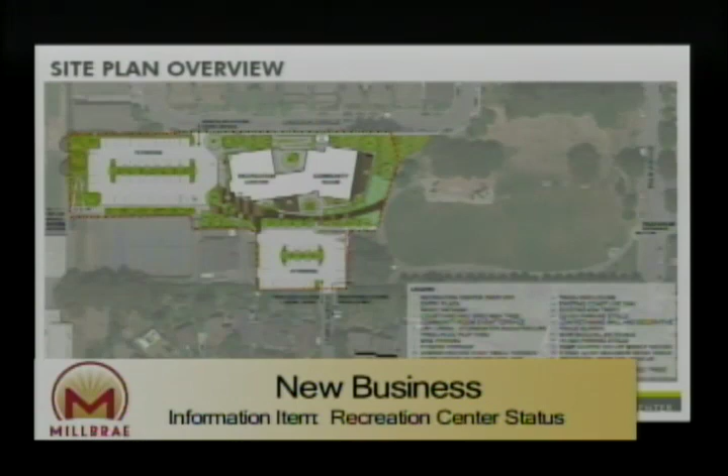So with the work plan, as Yana summarized, we're currently wrapping up schematic design. We're scheduled to go to council in August for approval of schematic design and have had two study sessions with them to refine the design.

As we look at the site plan, if you recall, what we're currently working on is what you might consider phase one of the site master plan for the park, and it includes all of the areas on your screen rendered in color, including the parking lot off of Lincoln Circle.

To the left of our screen is Taylor Middle School. The existing parking lot off of Lincoln Circle is about the same location as the proposed new parking lot. Our building footprint is located along our paseo, which connects from Taylor Middle School through the paseo down into the park. It's really important that we're working with the landscape architect to make the connectivity to the existing park and pathways, and to blend in seamlessly, even as this is phase one before the future phases might occur.

As we look at the different site amenities, we have the entrance, a parking lot of 72 spaces off of Lincoln Circle, accessible parking, a drop-off next to our entry to the building, and the paseo which connects down to the park.

We have a fitness patio located here, then the secondary entrance to the building, which connects to the community room where the restrooms and kitchen are. This can be segregated off from the rest of the building for special event use and security, being able to separate the community hall from the rest of the building.

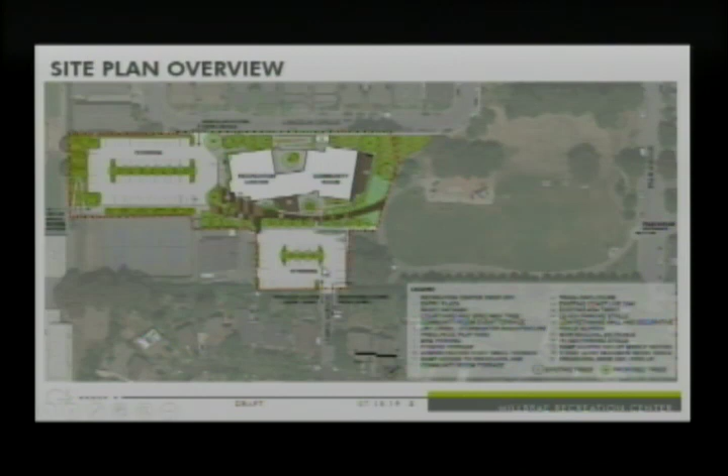The second parking lot, located over here off of Laurel, is also shown as improved, but pretty much the same footprint that we currently have.

As we look more at the hardscape finishes being proposed, we're really trying to build off the concept of nature, integrating into the park using neutral, natural tones—gray for the basic concrete, and colored concrete to create a nice pattern for the paseo as you proceed down from the Lincoln Circle parking lot into the park.

Looking at the special concrete marked item C, that's our fitness patio as well as the community room patio. What we're proposing there is to actually stamp the concrete. One nice option right now is a porcelain tile with a wood grain look, which creates more interest than plain concrete. Stamping it with the wood grain adds texture and differentiation from the standard concrete, setting those spaces apart.

As we look at the play yard located at item E, we're going to have a special surface appropriate for a play structure, if one is included. I think they're considering two or three different options right now.

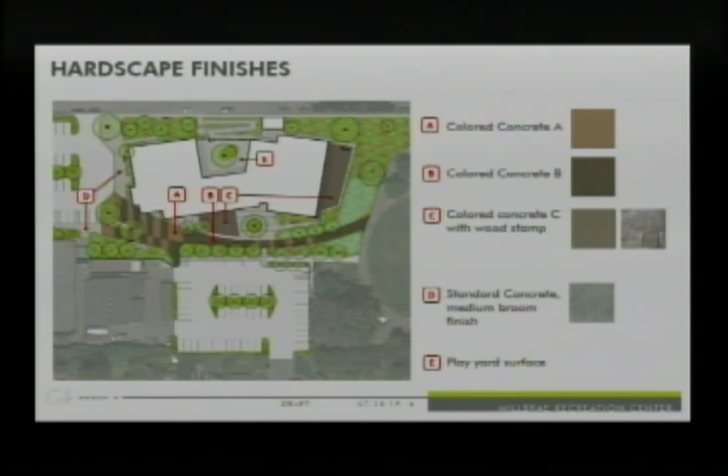So when we go further into the site and look at the site elements, we have the concrete seating that starts as the paseo as you're starting here on the left side.

I don't know why. Am I the only one who loses this mouse on this screen?

So I apologize, but really we're looking at having concrete seating that is both a small retaining wall as well as an interesting organic feature. These are kind of boomerang shapes, and we'll be able to use it, since there's a slight grade change here from the tennis courts down to that one court that we are removing as part of this project. We'll be able to accommodate that grade change with this nice concrete seating.

As we look up here on the top right, the precast concrete seat wall creates a nice amenity as you go down the paseo, an opportunity to pause, but also something that helps separate what we'd call the public and semi-public space. These rooms, these patios outside the community hall, are the semi-public space. If they're not occupied by a program, they're certainly welcome for the public to use, but if the yoga class moves out to the fitness patio, then it wants to be claimed by them. That's similar to the community room patio located over here on the right.

The nice circular planter surrounding one of our specimen trees has this nice circular bench, where we're integrating both wood slats, the natural material found in the park, with the concrete, to soften that up a little bit.

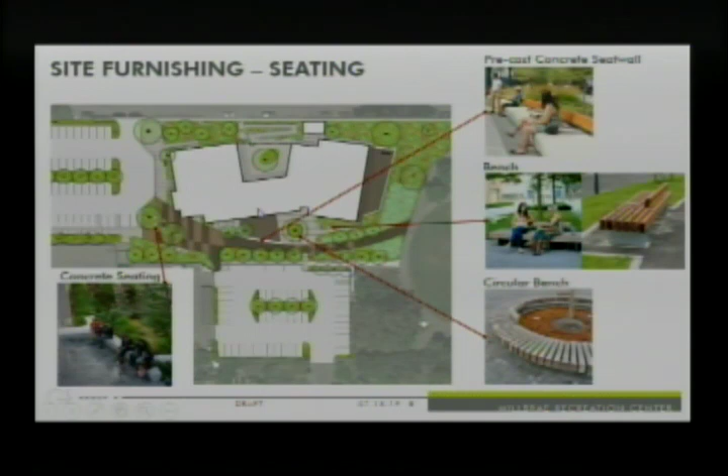That's pretty much our seating as we look at the site plan. I apologize if you have detailed questions about the planting plan, we'll have to refer those to our HAA, our landscape architect, who's not here tonight. But generally what we've laid out with them for the tree plan is highlighted here.

Looking at the color related to the different trees on the right, the key specimen tree shown in purple is the western redbud. So we're picking the trees and the palette of trees to create a nice complement of colors throughout the year, ones that are very environmentally appropriate for this site. I know they did not choose necessarily all natives, but it was more intentional that they be environmentally appropriate.

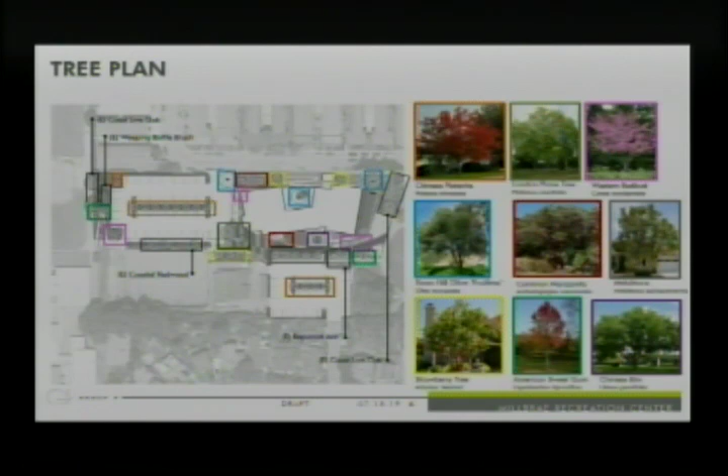The coast redwoods are currently located right along the paseo, along the existing tennis courts, and we're going to work hard to retain those. Those are a lovely little glade of trees right there, and you can see we're building off of those and incorporating them into the landscape for the parking lot, right along here.

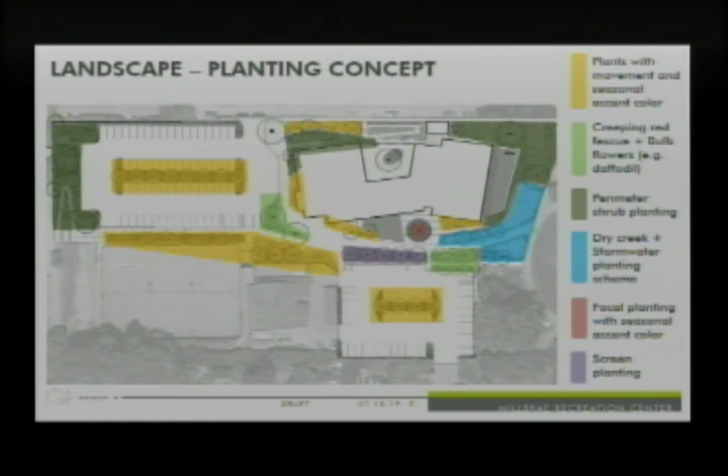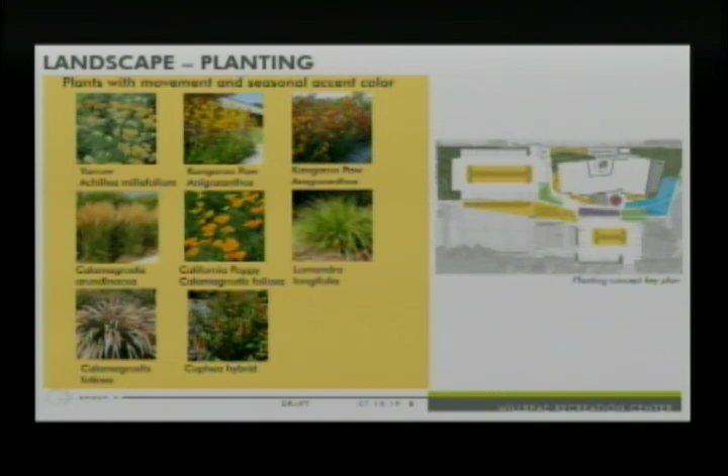As we look at the landscaping concept, we've got these color-coded for you, and I'll go to the next slides, which go into more detail about the types of plants for each area. The yellow area is about plants with movement, seasonal accent and color, using grasses and things like native California poppy, lower height landscaping that creates movement in the parking lot. Someone commented on our lovely seasonal wind happening right now, so why not use that to activate the landscape?

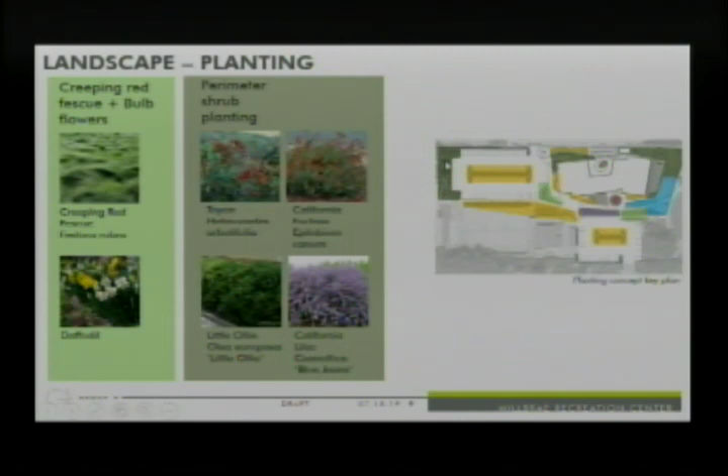Moving to the landscape shown in green and sage color, this is the creeping red fescue, bulbs and flowers—again a little lower, around the entry drop-off and down along the paseo, with the perimeter planting shown in the sage color.

One of the great things we're doing along this paseo—if you recall, the grade changes and drops off as you come down from Taylor Middle School—is that we're taking our stormwater and treating it in this blue area, coded for water-friendly plants. That's where our bioswale is, where all the water from the site will be diverted and cleaned before it's captured into the stormwater system.

We have the screen planting in purple, and then the focal planting with seasonal accent color around that second entry by the specimen tree as well.

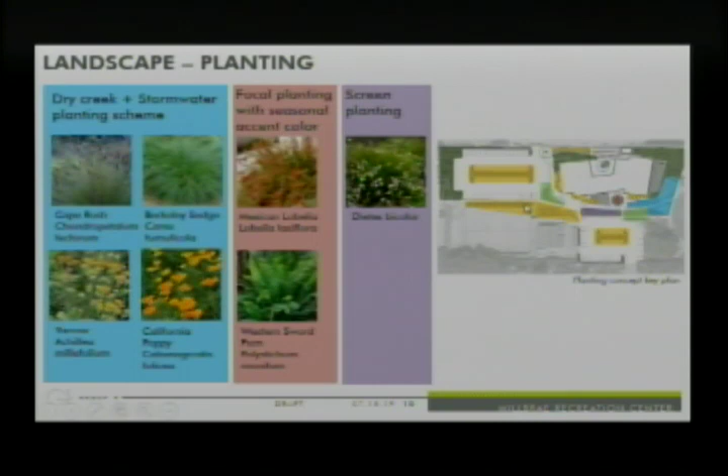I hope I didn't cover that too high a level for you again, but happy to get back to you if you have any specific questions on the planting.

One of the things we worked hard with council on this last couple of months was the selection of exterior materials. We went through different options with them for the stone, different scale, different types, and we're pleased to present the selected stone tonight. It's Vegas stone, from a quarry right outside of Vegas, and it actually meets the 500-mile requirement for LEED material, within the 500-mile radius.

The scale of the stone selected by council is 6 inches wide, as shown here, but it's actually a longer plank, I believe 48 inches. So it's more of a plank than a brick, but it is proportional and reminiscent of the red brick used at the Civic Campus here.

You can see the color we've also selected with council: two different colors for the stucco, a lighter taupey color complemented by a more mocha color.

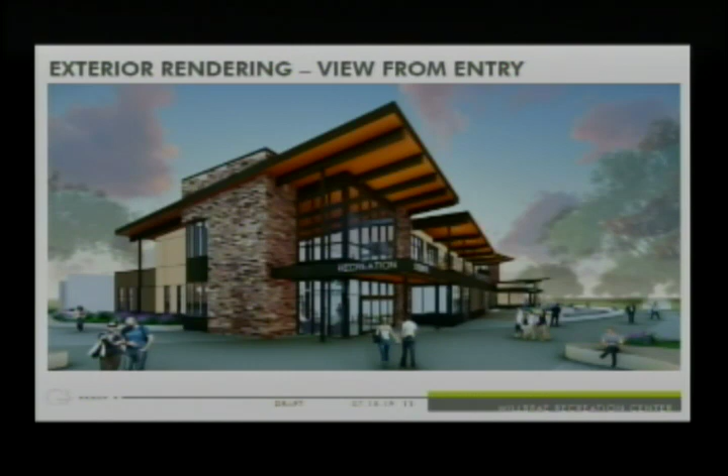The wood grain material you're seeing on the materials board is actually our soffit. You can see the soffit is with our lanterns. We have bigger overhangs reaching out, and those soffits are all exposed with the structure exposed, so that wood material will be on the bottom of the soffit.

What we're using for the metal for the storefront and the windows is a nice darker color, which you can see there as well. So that's the color scheme and the materials that have been selected by the council.

The rendering we're looking at right now is right at the top, looking down the site, down the paseo on the right, as well as the drop-off on the left. You can see what we kindly refer to as our chimney entry, which anchors this facade. Our first lantern is the entry lantern, the tallest one, which reaches up, and at night you can imagine this with the light and activity inside, how warm and welcoming it will be, a really nice draw for the community.

The entry doors are located right here, very convenient to get inside to the reception desk and the program spaces. But most importantly, from this view, you can actually see down to the community room as well. So if you're coming at night to an event there, you'll be able to see exactly where you're going, because it projects further out and draws you down to this second entry on the site.

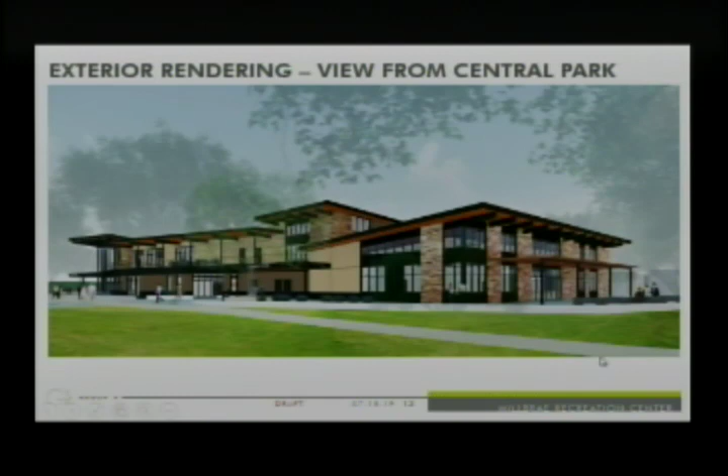The second lantern, as you come down from the paseo, pops up here at the vertical circulation and that second entry I mentioned, right here.

Here is the color coding for the different materials on those renderings I just shared. The lighter color is our base material, the more expansive light color used throughout. Wherever we're using a darker color, it's on support spaces or spaces we want to recede into the background and not draw attention to. This massing on the far left is actually the staff workspace, so people don't need to go there, and it can recede a bit in the elevation.

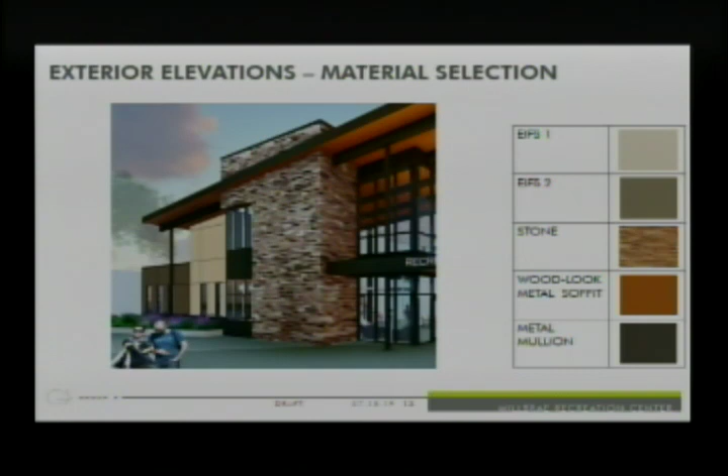The wood soffit material we're using is actually a metal with a wood grain on it. It's very durable, low maintenance, and a nice complement to the other materials on the exposed bottom soffit of our roof, as well as the stone rendered here in the planked 6-inch wide, and then the color of the mullions on the storefront, doors, and windows.

I'm not sure how familiar you are or how much you remember the floor plan for this center. Would you like me to walk you through that? Would that be helpful? Yeah.

Okay, so starting at the bottom left arrow, as you come off of the drop-off or from the parking lot off of Lincoln Circle, or from the Laurel Street parking lot, you come into the main entry here. There is a stair that takes you to the second floor as well as an elevator, on either side of our reception desk, with staff space directly behind it providing visual connection and oversight.

So if somebody needs help out front, the rest of the staff can see what's happening and quickly move to assist. We have a conference room directly adjacent that will be shared by both the public and staff. Across the hallway, one of our first rooms is the game room, envisioned for a lot of after-school programming with teens and kids, but also available in the mornings for other uses, both adults and seniors.

The light blue area adjacent to the staff bar is our 2 preschool rooms, designed to be licensed preschool. Each classroom can accommodate 24 kids. It is completely securable and can be separated from the rest of the facility for operations, really having its own business plan. It's not necessarily integrated into the center, but it is accessible from it, and there is a door for drop-off right here.

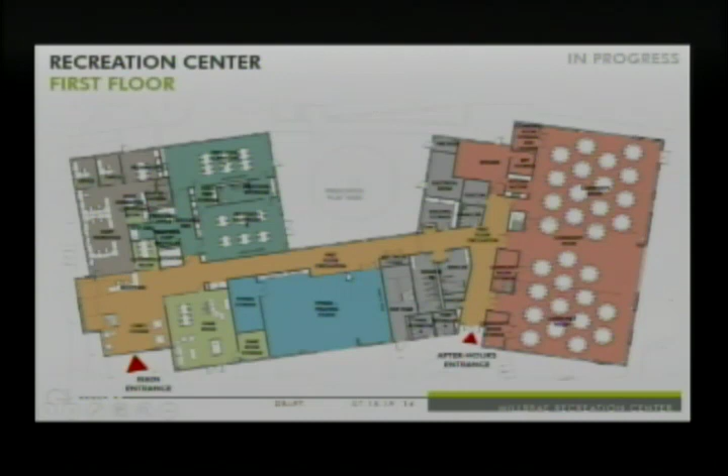Moving upstairs, either coming up the stairs or the elevator, which is located right here. Our volume from this lobby is open to below to get that internal connection and visual connection. When you come upstairs, directly on top of the stairs is this nice conference room. Then over on the right, we have connection to the patio, which overlooks the Paseo and the park.

The senior lounge, which is adjacent to the conference room, we're envisioning the walls to be like a NanaWall, which can recede back. So the senior lounge could actually expand out to incorporate this whole area if they're having a bigger event or want to make something a little more special.

We have the art classroom, as I mentioned, on the north side of the hallway here, with lots of daylighting coming from that north light, as well as viewing down into the children's preschool yard.

Moving down the hallway, we have our 2 classrooms at the end, and this is the other lantern, which projects over that second entry on the first floor. So this is that second lantern volume here. This room is also divisible into 2, and you can see it has direct connection to the patio here. Recreation staff thought that'd be a nice amenity for potential revenue in case somebody wanted to rent or use this classroom, as well as have access to the patio.

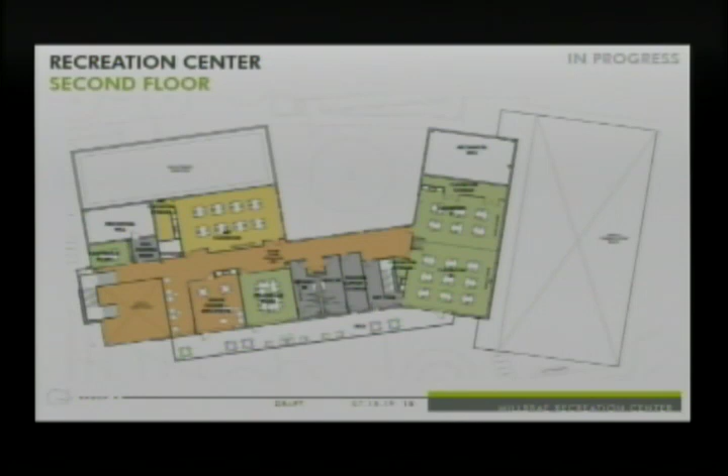So that basically summarizes our design presentation for the schematic design. Happy to answer any questions or go over anything I might have covered too quickly.

Does any commissioner have any questions for Group 4? I don't have questions, but I have comments.

It's beautiful. I've seen it in every stage, and obviously it's evolving as we move along, and more details are coming in, and it just gets more beautiful every time. I cannot wait to be inside of it. That's it.

Joe? Thank you, I totally concur. I think it looks really beautiful, and thank you for all the work put into it for everyone. I know City Council's been spending a lot of time on it, and Parks and Rec and everybody. So it'll be great to have it done.

I just had one question, in terms of the conference room, what is the capacity? So there are multiple conference rooms. Looking at the conference room on the second floor, there are 2 of them up here. The one at the top of the stairs on the left side will accommodate 6 to 8 people. The larger one over here is about a 500 square foot room, so that's going to be about 20 people. Then there's also a conference room on the first floor, which is again another 6 to 8 person conference room.

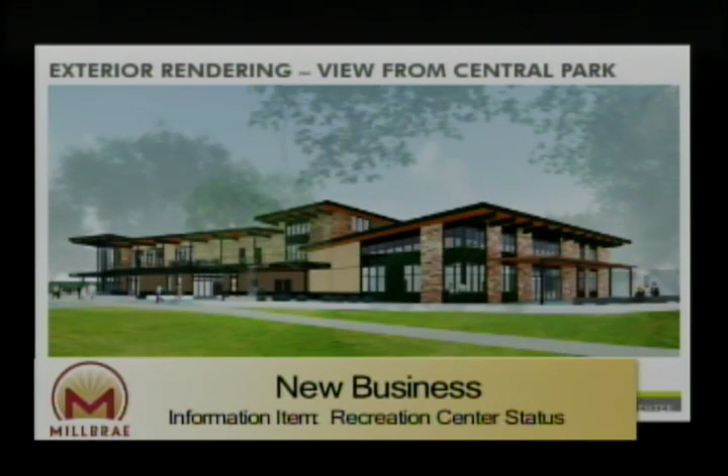Thank you. And then we also have outside, the nice patio as well. The patio is meant to complement the indoor space, and the doors will open up completely and the walls be removed, so you can actually go from indoors to outdoors. So there'll be overflow capacity and be able to hear in.

I'm just curious about circulation and parking, because right now the parking lot is off of Lincoln Circle. Is there only one entry to that parking lot? Yes, there is only one entry, but we've significantly improved the circulation. We worked with Hexagon, the traffic engineer, to assist in the layout. Big improvements over what is currently there, which is currently one way. Now we have 2 directions, and we also have the designated drop-off.

One of the things that came to our attention during community outreach was the conflict with drop-off of kids at Taylor Middle School. Even though it's not a designated drop-off area, a lot of parents use it and it has caused conflict with the seniors. So having the accessible parking over on the bottom side here, and then the drop-off here, hopefully will alleviate that. But really, it's about traffic management for the school, and perhaps while the site is closed during construction is a good time to train the parents to drop off at the appropriate places, was the thought.

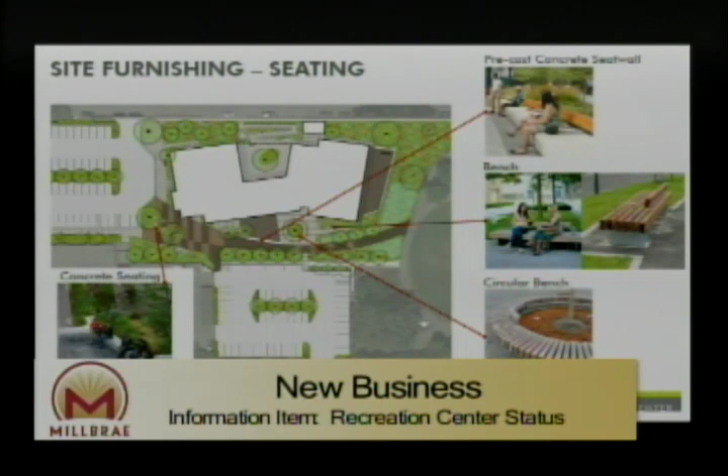And then the trash truck would just pull over on Lincoln Circle? Yes, just along right here, so just like they do for most street pickup, they'll pull up here, pull out the bin, front load it, or side load it if it's the recycling. We're working with Recology on the dimensions and the different containers that will have both composting and recycling. Thank you, and I just have one more for you, please.

So I know that at the beginning, when the whole discussion of the senior lounge and kitchenette came up, being on the second floor, there were some concerns about access or egress for emergencies. Can you let us, I know there have been a lot of meetings on it, so can you just update us on that?

I presented to the Senior Commission the same concept just six weeks ago, and they were very pleased with it. I don't know what has helped with some of the concerns, other than pointing out that most senior housing, most senior health facilities actually have to do multi-story now. There's very few single-story facilities on the peninsula, just cost of real estate and the goal to keep open space, and that we are actually significantly closer to the senior spaces than it had been previously. As you come in, you're directly to the stair or directly to the elevator, which was given as priority. And then what the seniors really liked was that they're segregated away from the noisy activities on the first floor.

And in the case the elevator goes down, they do have evacuation chairs that we will have readily handy, that can be used at both stairwells. What is an evacuation chair? If the elevator goes down and somebody is disabled and needs assistance to evacuate, there's a chair that you can pull out, it folds up in your storage space, and the person can transfer from their wheelchair, and you can safely transport them down the stair. It's called an evacuation chair, designed to take people out of stairs who need assistance.

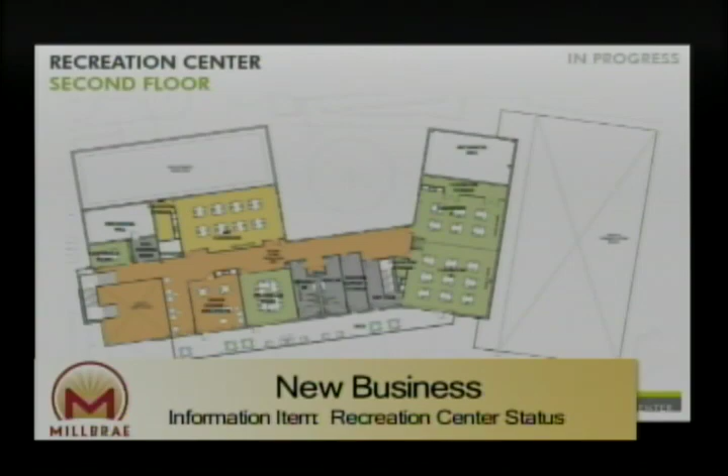And then you also have the community room downstairs. What other facilities within that community room do you offer? Audio, video, speakers, podium, that sort of thing, projectors? Could you give us a rundown?

Each of the rooms can function independently with full AV, as well as the room as a whole. We've opted out of putting a fixed raised platform or stage in there because of the flexibility it gives you - you can bring in a mobile stage and configure it in the round, in the square, put it inside or outside, move it out on the deck if the weather's nice, and have your band outside playing to the inside.

The tables and chairs will also be part of the furniture package, as well as the sound system and lighting system. So all of that is an integrated AV system to support the room and its multiple configurations.

The classroom upstairs is separated by a temporary movable partition, similar to what you see in hotels and convention centers. It has an STC rating of 45, similar to office walls in a commercial building. It has a top seal and bottom seal when expanded, so the acoustical seal is there, making it higher quality than buildings from 30 or 40 years ago - much more commercial grade, like convention centers that get set up and broken down 4 or 5 times a day.

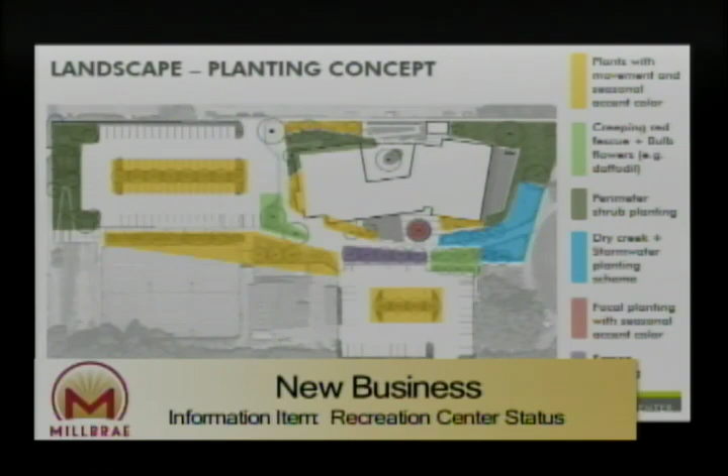So does it sound like it's a possibility in the future, when you reconfigure the tennis courts in those areas, that a connection between the two parking lots can be made? The approved master plan for the park has the two connected, with access from Lincoln as well as Laurel. Okay, that's better.

Okay. Any other commissioner wish to make any comments or questions at this point?

I thought one interesting feature, going along with the funding for this, is whether there's been consideration for a really big outreach for donations, and maybe creating some type of creative feature where we have recognition of major donors.

Naming rights? So we're working now on a naming rights policy, looking at what our neighbors and other communities have done, as well as something like a brick, but a lot nicer. We're looking at some options for how to do that and what the numbers would look like. That's absolutely one of those considerations we definitely will be doing. It's not a possibility, it's happening - we're just working out how the numbers will look.

I'm not suggesting we have a really commercialized wall, just something artistic. And if you know of businesses interested in a larger naming right, we're certainly very interested in hearing who might be interested. Our city manager will be working on that. Potentially every room could have a name associated with it - exactly, if the price is right.